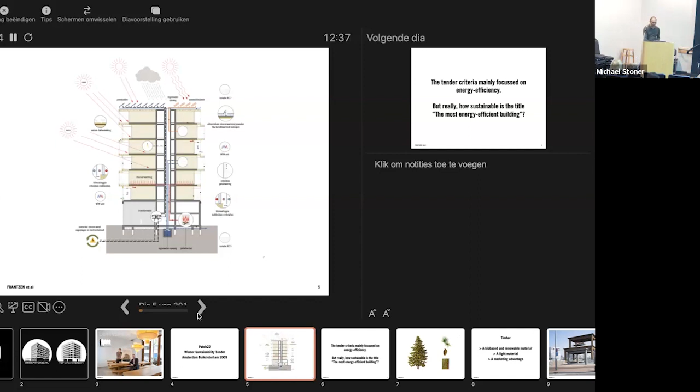So the building is full of solar panels, heat exchangers, gray water circuits, all the technological stuff you can think of, it's in there. But actually, we thought that was quite stupid, because I wouldn't be speaking here 14 years later about this building if it was about installations, since the installations were already old-fashioned in 2015 when the building was completed. For example, the energy score on the Dutch scale is 4.2, which was very low at that time. But nowadays they already make buildings that have a -0.3. So how sustainable is it, being the most energy efficient building?

So we thought we had to go the other way, and we had met Michael Braungart, the writer of Cradle to Cradle, and we were very interested in his theories. So we decided we had to start building with renewable materials, and the only renewable material we really have in the building industry is timber. For us, timber was, of course, bio-based and renewable. It's a very light material, so from a building perspective, these are advantages. But also for us, it was a marketing advantage, because building with timber in the Netherlands hadn't been done for ages.

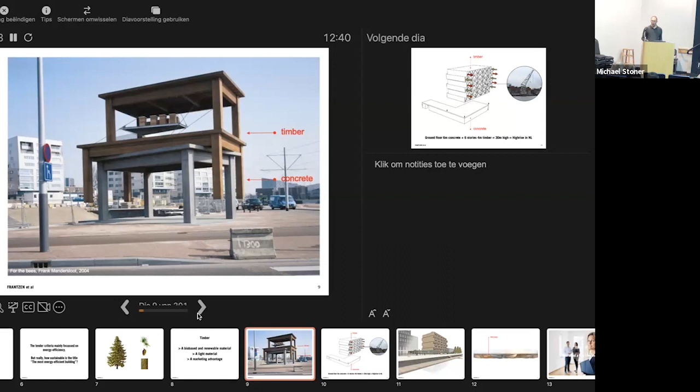It's a concrete table with two timber tables on top, and a beehive in between. This more or less is our building, as you'll see later. It's a concrete podium with timber floors stacked loosely on top, and in their identity they reference the harbor cranes. That's the architecture that we did.

I can also tell the other story of how it went. Every architectural office has interns, and interns always make models. Our intern had cut up styrofoam volumes to create this volume study, and she'd stacked them loosely because she still had to glue them. I passed by to get a cup of coffee, saw the loosely stacked floors, and thought, stop — that's what we are going to make. That's more or less where the architectural concept ended.

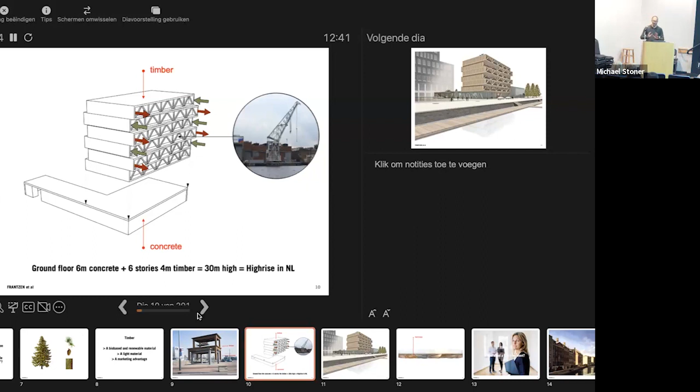And it looked like this. This was our initial rendering for the tendering competition. On the basis of that, we won this lot. So this is yours now. And then we had to start building.

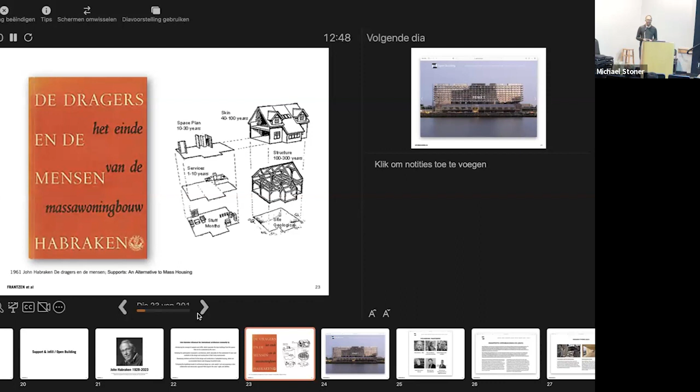And it was already developed in the 60s, and we are shown this diagram now over and over again when we are at congresses and conferences on circular design.

And with this, a number of architects in the Netherlands founded the Open Building community. We have 14 founding fathers, all architects, who all chipped in to get these ideas going again. We wrote a manifesto about how we want to design buildings.

We have research teams, and one of the research teams is Open Building with Timber, so I'm also going into how to build with timber today. A lot of case studies—we document all our buildings on the website, so if you're interested, have a look at it.

Also important, on the bottom we have developed a classification system, and it's a qualitative qualification system. So it's not quantitative, but it more or less says if we want to speak about a very flexible or a maximum flexible building, this is what you have to achieve.

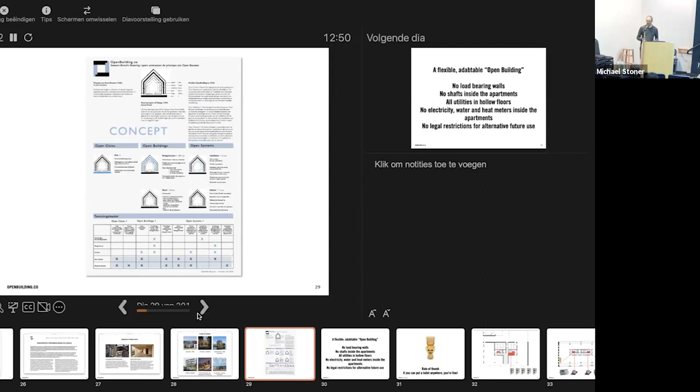There are things like: installations don't coincide with the structure, you don't have load-bearing division walls, and you can have a removable facade. So these are all qualitative elements, and we want to stay in the blue zone—the very flexible or maximum flexible zone—as a group.

So what is a flexible and adaptable open building? For me, it's a building that has no load-bearing walls. It has no shafts inside the apartments, because shafts will always be in the way. If you have a shaft inside a floor plan layout of an apartment, you will not see it when the apartment is finished, because it's hidden by the kitchen and the bathroom.

But if in the future you take the kitchen and the bathroom away, you will have the shaft standing in the middle, and then the next floor plan will also put the kitchen and bathroom next to that shaft. So if you want to make a totally open building, you have to get rid of the shaft. And of course the question is, how do you do that? You also need to have all utilities inside hollow floors.

And you have to be able to replace them later on. Also very important: electricity, water, and heat meters. At least in the Netherlands, you have the building code that says it has to be this wide, but you also have the electricity company with its own private regulations that you have to deal with.

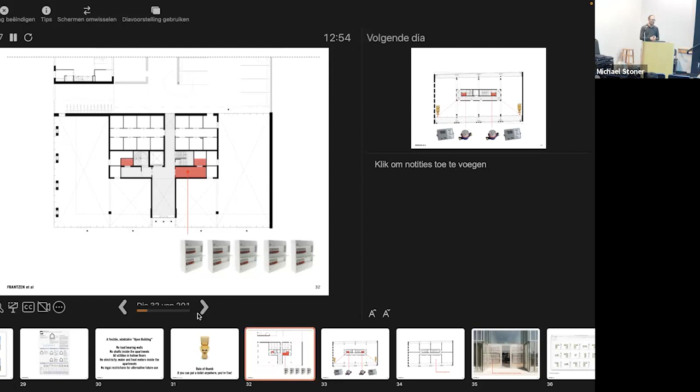So what did we do in Patch 22, starting at the ground floor? This was very innovative in the Netherlands. We have a meter room, so we have all the electricity meters of every apartment in the building in one space, which is very normal for an office building. That's why we made sure that Patch 22 is not only a housing block but also an office building—it complies with both sets of regulations.

Then we have the shafts in the central core, the structural core of the building. We thought, okay, if we can put the toilet in the outmost corner of the building, and we have enough sloping angle in the floor to get to this central shaft, then we're good. And in the central shaft, we made it so big that we can also have the water meter and the heat meters—they are all in that shaft.

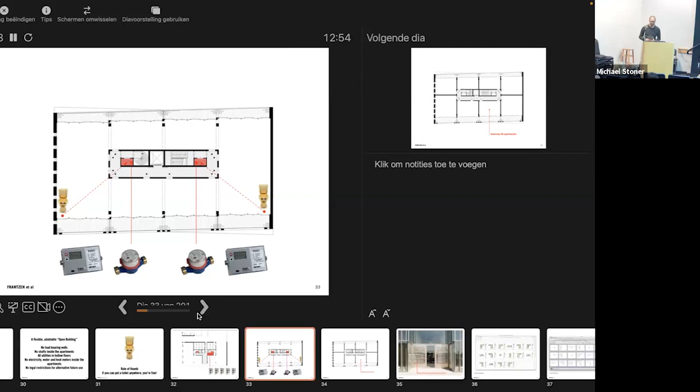And we can divide the floor up into a maximum of 8 apartments per floor. So we also have 8 front door positions, plus 2 extra front door positions, because these apartments in the front can have very different floor plan layouts if you are able to move the front door. So you need to think of a lot of possibilities in advance.

Also the mailboxes—sounds quite stupid—but we can do all the adaptations in the future without a building permit, because it's already in the first building permit. So we also have all the mailboxes of all the possible apartments already in the facade, because you cannot change the facade in the future without a building permit, and it's also quite hard to add extra mailboxes, so it's already there.

But also, for example, house numbers. An apartment is worth more when it has a nice number—so the number 280 would be worth more than the number 278A or B. So we had an agreement with the city that we have a secret list of house numbers in the city's administration for all the future apartments that can be activated in the future, so that we have consecutive full house numbers.

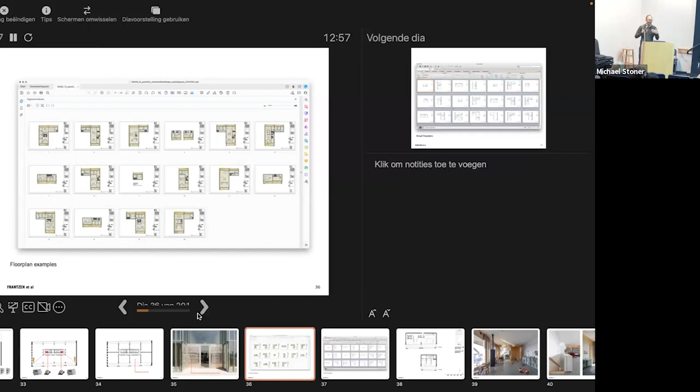With all different kinds of scenarios in mind—the double income no kids, the gay couple, all the stuff you can think of in how people are going to use an apartment in different ways, because they will want a different floor plan layout. By doing so, you sort of play the game that you don't want to know how it's used—you only do scenarios so that every scenario is possible in the future.

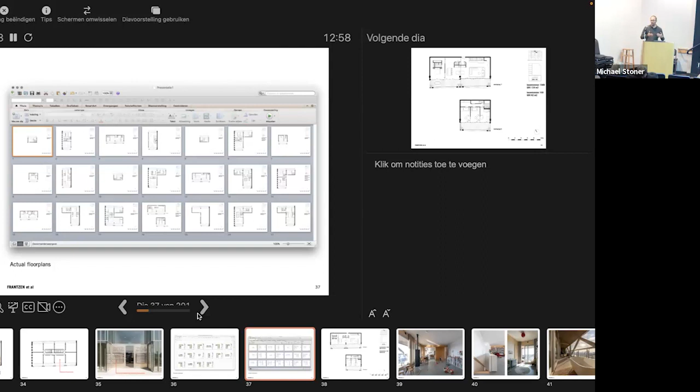And the funny thing is that none of our floor plans is actually realized. We sold the apartments empty to our buyers, so they got completely empty apartments where they could design their own floor plans with our interior architects, or with their nephew or their uncle, and build it with their own contractor or themselves—everything inside was their own initiative. People are a lot more specific than we as architects can think of in our scenario thinking, but that scenario thinking you need for researching the possibilities in the future.

When people can do everything they like, they start installing bathtubs on balconies, something that we as architects, or one of my former clients, would never allow me to do. But they just did.

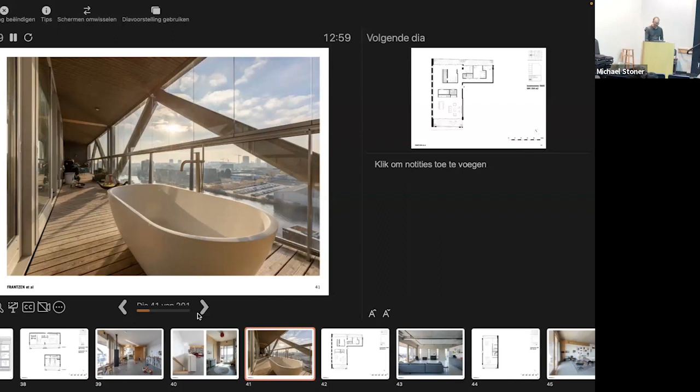Again, an open floor plan, also quite big apartments. We developed this building in the middle of a financial crisis, so we had to sell in 2012, 2013. That was a deep financial crisis. Normal people couldn't get mortgages at that time, and normal apartments were still for sale.

Our competitors, other developers, started building smaller and smaller to increase the income per square meter. But we thought we had to go the other way. We sold bigger and bigger to get to another type of client, because we wanted a client that wanted a special building and that dared to buy a timber building, a timber apartment.

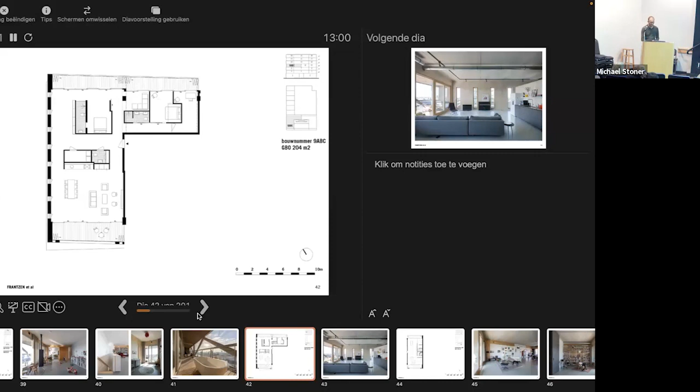So here we have one of our buyers that had all the timber still visible, and everything he added into the building is also timber.

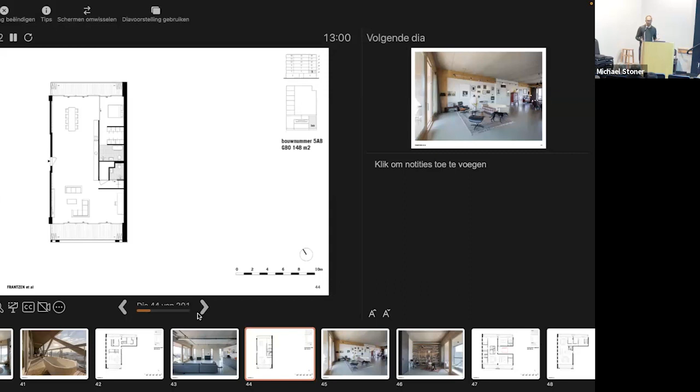Here we have one of the smaller apartments. This is 150 square meters, of a couple that didn't have much money at that time. So they created a floor plan with the least possible amount of walls, because walls are expensive. They created this really nice loft space, where you can also see the bare timber, and you can see that he's very happy with this creation.

Then this is our own apartment that I designed for me and my family in 2015. But then, in the end of 2015, my wife was appointed as a professor in Copenhagen, which in US standards is not far away, but for us it's a different country. So we had to move 800 kilometers to another culture, another language, another financial system. And Copenhagen, when you ever visit it, is really expensive. Having a big home in Amsterdam and a big home in Copenhagen, we couldn't do it.

So we had to sell, which of course, you know, this is my baby. So I didn't sell all of it - I kept the kitchen. This was sold, and it was completely redone on top of our utilities that were already installed.

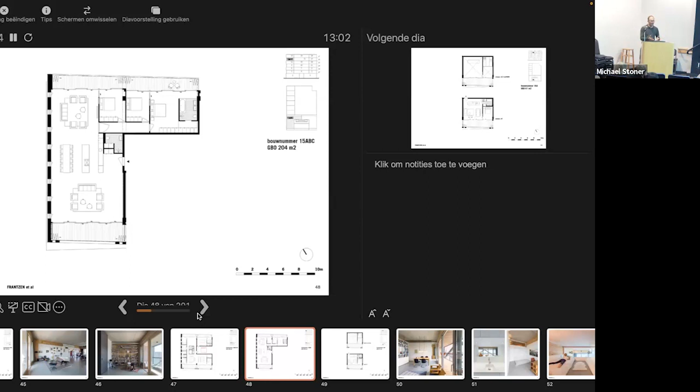You can see that it's possible to create a totally different floor plan on top of it. This was our kitchen, and we dug some holes in our top floor, and the smallest employee of my contractor, went into the floor because it's a hollow floor, and cut up some stuff, connected some things.

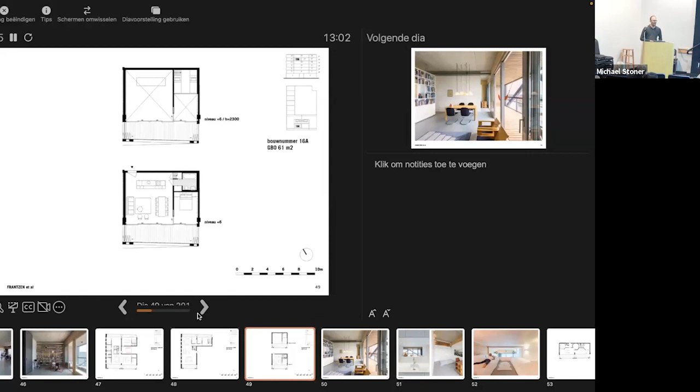It's a 61 square meter apartment, so this is perfect for a couple, with a Murphy bed coming out of the wall. Because when my family was living in Copenhagen, I also used this as my office, so I could simply get rid of my bed.

And here we had a storage space on top of the bathroom, and we stored our kids in there.

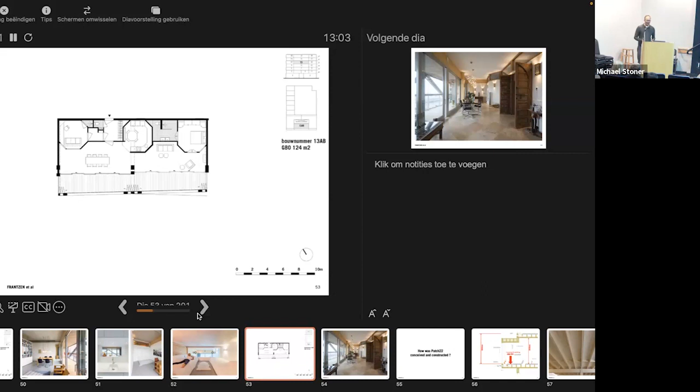A floor plan that you wouldn't come up with as an architect, not often at least. But it actually is quite a cool floor plan. When you see this, it's totally not my style - I hate the style. But I really like it that it's inside the building, because the owner of this apartment...

It's her style. She went to Morocco to find these antique doors. She went to Spain to find the right tiles for her individual expression. And I think that is very important and very cool.

So let's go a little bit into detail - how was Patch 22 conceived and constructed?

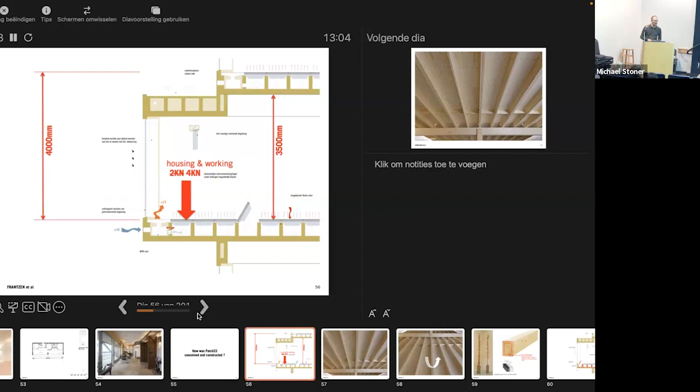As I already said, it is housing, but it's also an office building. But an office building has a higher floor load than a housing block, so it's 4 kilonewtons per square meter instead of 2 kilonewtons. It has a higher floor, so it's totally oversized, because in an office building, perhaps you need some pipes, some ventilation pipes, and everything day one. So you need the oversize.

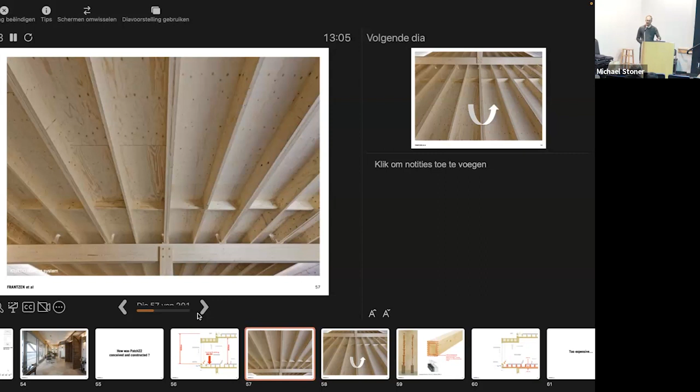Our idea was initially to create it with a prefab timber flooring system called Kerto, but not to use it like this official way. We thought of just using the same product upside down, and then filling these, because you always need a ceiling, but you need to be able to get rid of the floor to access all your utilities.

Then you come to the question of how to make timber fire safe. We are very lucky that in the Netherlands we have a building code that doesn't say how to achieve a performance, it just tells you what the performance needs to be. So for our building, our structure needed to be 120 minutes fire safe.

Inside the tree, there's always another tree. So if the small tree is your structural tree, and the timber around it is only for fire safety, you can let this timber char away. You can very easily calculate the charring time. The charring goes by 0.8 millimeters per minute, so 120 minutes times 0.8.

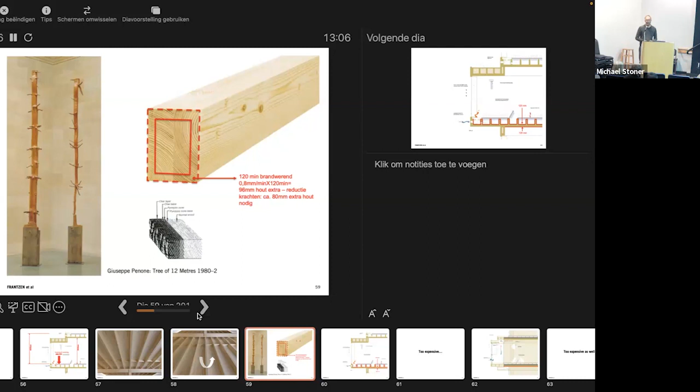Then we have some reduction factors in the Netherlands, because our building code says when there is a fire, there will not be a storm. If there is a storm, there won't be a fire. So in the end, we had to add 80 millimeters of extra timber on top of our structural timber. But that's really easy to do—you just increase the sizes, and as Michael Braungart already explained, when it's renewable, it's okay to use a lot of material.

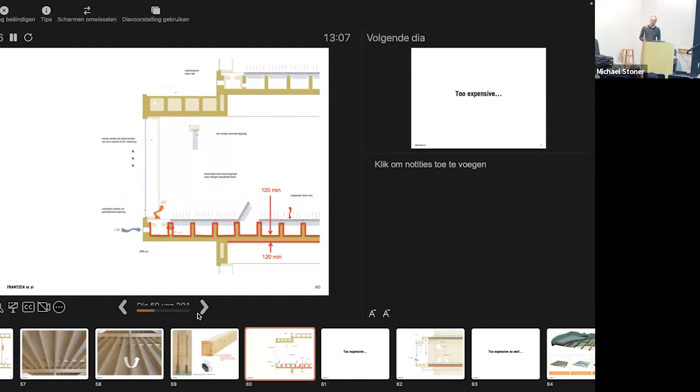But then we got to this point that our structure had a lot of surface, so we had to add a lot of extra timber on that surface. And because this is high-tech timber, it's quite expensive. So actually this idea was too expensive. Then you have to come up with another idea.

So we found a product that worked as a sort of prefab timber slab with a prefab concrete slab on top of it, and then we would have a raised floor on top of that structure. That was already better because the surface of our structure was less, but it was too expensive as well. You know, and I'm a project developer, so I also have to make profit.

So then our contractor came up with an alternative flooring system, and he wanted us to use the slimline flooring system, which is a floor plan system that has been tested and everything. They didn't dare experiment too much with the floors in the building, because the building also had to be insured, and insurance companies are risk avoiding, so that was quite a problem.

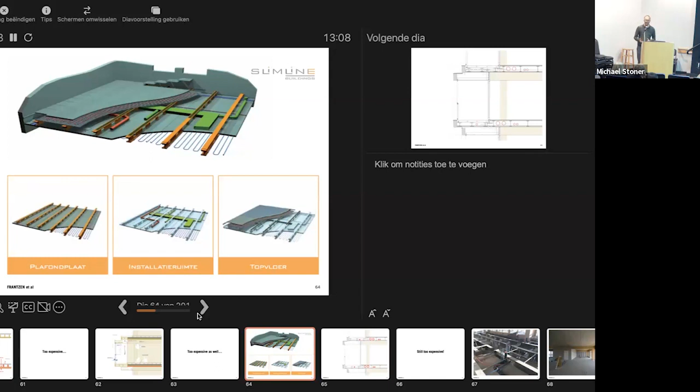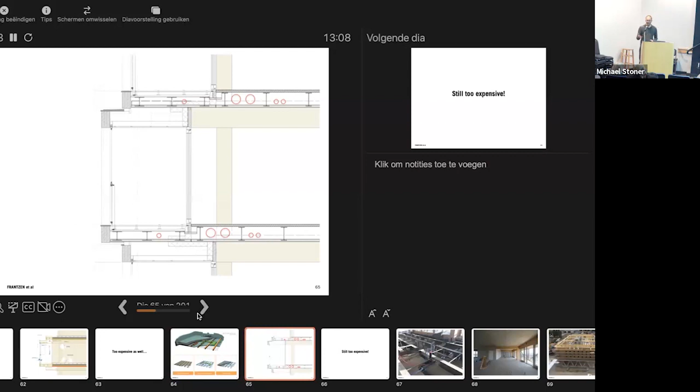So we used this product, and in this floor we have all the utilities, so you can take off the top floor. It turned out that was still too expensive, but anyway, we were already too far in the building process, so this is what it is. It was too expensive, but technically it works perfectly—you can take off the top floor, install all your utilities, and suit it to your floor plan layout.

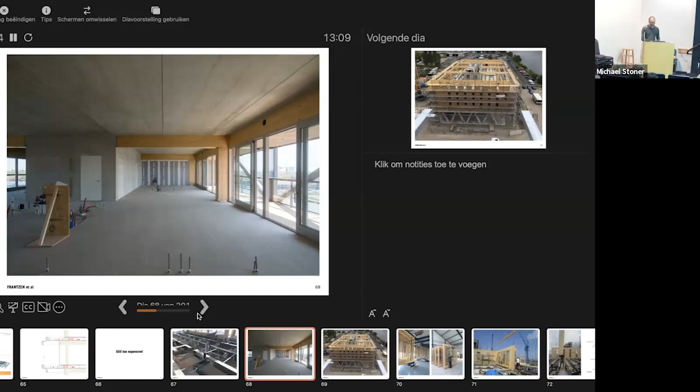And this is what it looks like. This is our apartment, what it looked like before we sold off three quarters of it. So all the pipes and drains and everything are already in the floor.

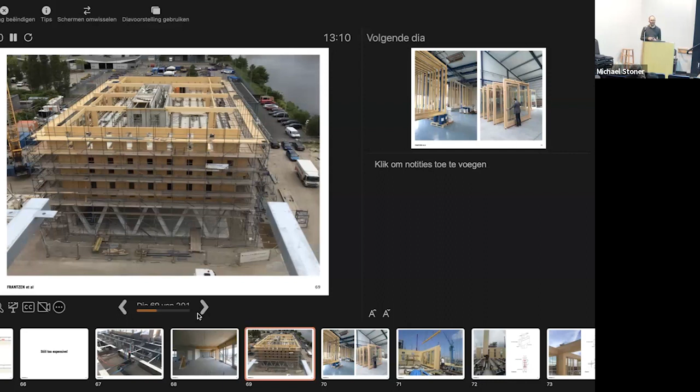The building itself has been built with a lot of timber components, so it's a timber post and beam structure, again to decrease the surface of our structure. If you have load-bearing walls of CLT, you have so much surface that you have to add so much charring timber that it becomes enormously expensive. So it's kind of paradoxical—normally a post and beam structure is more expensive, for example in concrete, because you have more connections and more casting, and that's why in concrete you have load-bearing division walls.

But all the components here are built of timber. Then the components are packed together into bigger components, and they are installed as prefab components on the building site. When you have a timber construction, you have a lot of steel connectors in between, and you have to protect these steel connectors from fire. The funny thing is that the timber you put around it protects the connection.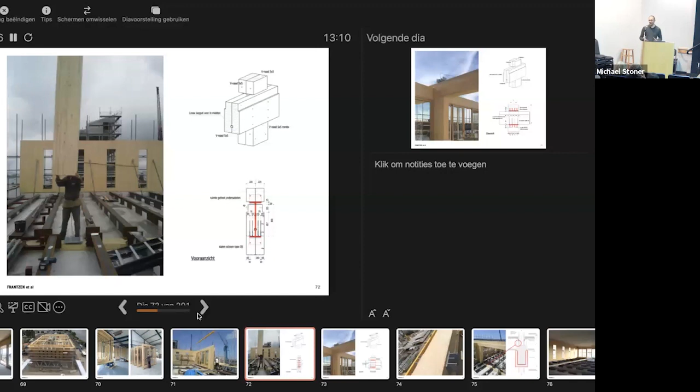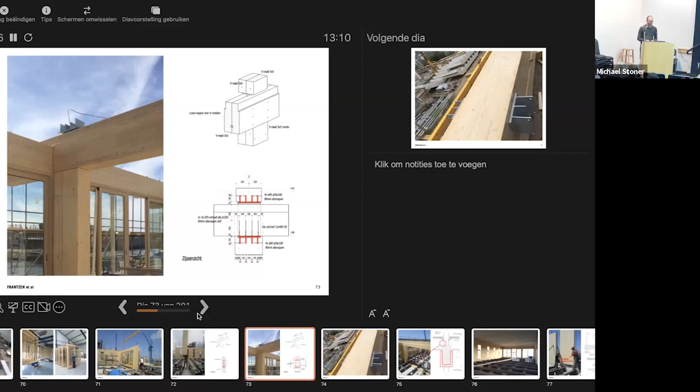This is the same detail, but seen on the other side. And here it's in reality, but it's rotated 90 degrees. It's on the building side.

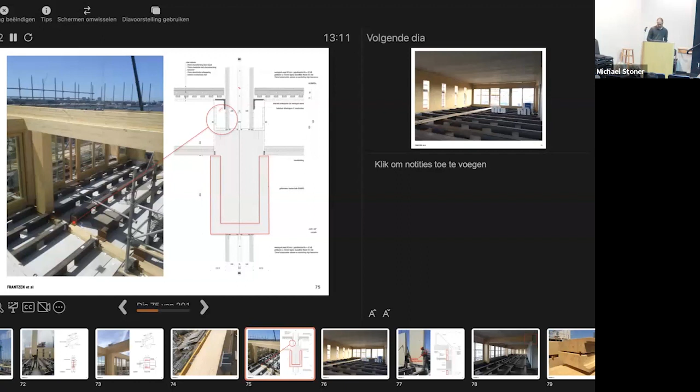This is also an interesting detail. Normally, you would have a beam, and then you would make the beam like this to have joists lying on top of it. But imagine a fire, and then that part chars away, then the floor would fall downwards. So that cannot happen. So we added something, you will see it here. So structurally, the joists hang on top of the beams, and not over here, where it normally would be in a concrete structure.

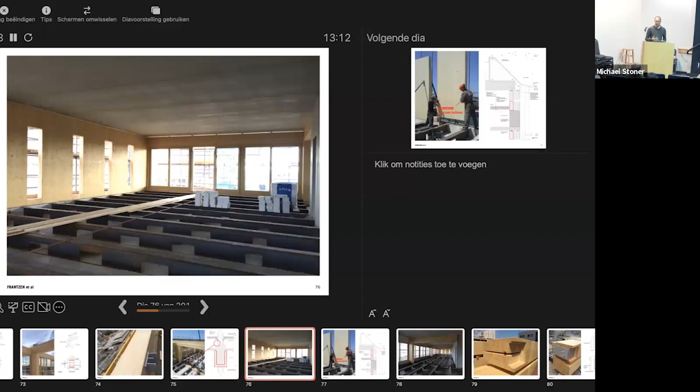So this is what it looks like when the building is totally empty, when we sold it to our clients. And to build it, we had to hire a prefab concrete company, because nobody in the Netherlands had experience with building timber buildings like this. But it really resembles prefab concrete building. The only thing was that normally when these concrete builders have these steel rods with which they push the elements, that's okay because the concrete, they will repair it and paint it and everything. But you cannot do that with timber. So we bought a lot of brooms for them, and we had them use brooms to position all these elements. And well, they found out that it was actually as easy as building with prefab concrete.

But you also see that they make mistakes, because in our detail, this was felt rubber for soundproofing issues, and they had cement in between, because that's what they normally do. And this was on a day that we weren't on the building site. So then shit happens and you get problems.

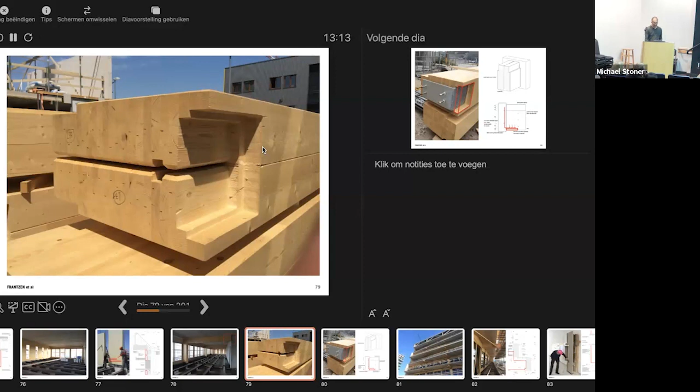This is another important detail: how to connect a beam to the core. And the beauty of building with timber is that you can mill away a lot of the material, so you can make very special detailing, and you can use the timber again to protect the steel connectors in case of fire.

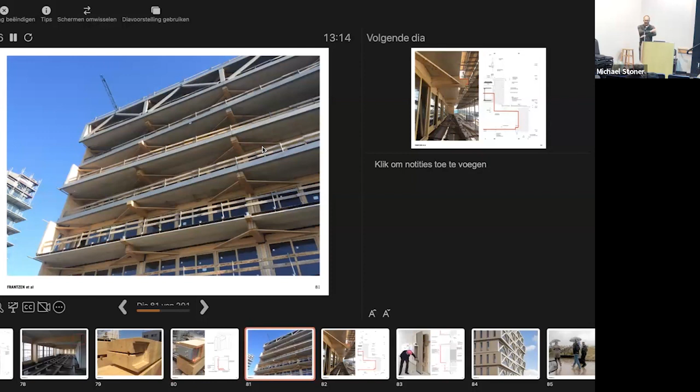And I already explained that the building is a little bit like this, and therefore it was really good that we built with timber, because all the endings of all the beams can all be different since they are just milled. So you can do a lot more special detailing in timber than you can do in concrete, because in concrete you have to build the casts first, and then they all have to be the same, since building 25 different casts would be incredibly expensive. But with timber you can just mill it.

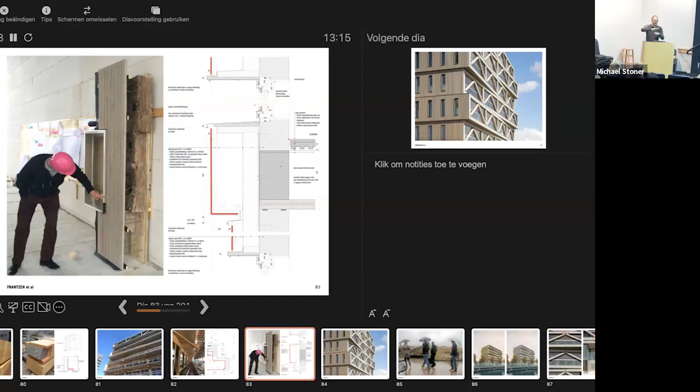This is a detail of the facade. With us, we are lucky - it's allowed to use timber on the facades of high rises. Well, of course, they are treated for fire safety. But in this way, we could detail the building so it looks like different boxes. And very important is that we use the windowsill as one of our main detailing ideas. We have windowsills going over every level, dividing every level - you will see that in the next part.

Because we have these different boxes, and once you start detailing boxes that slide over each other, as an architect you will always have the problem that the floor and the ceiling sort of intertwine. By using this windowsill and making really clean cuts, we were able to suggest this shifting of boxes on top of each other.

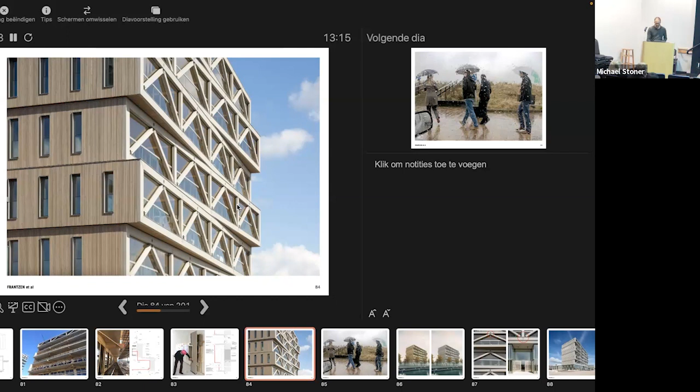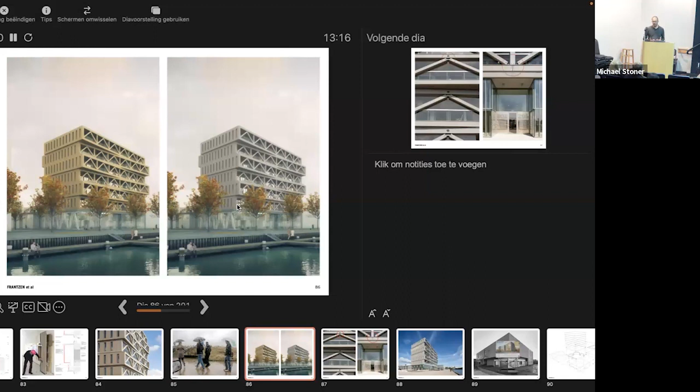So in our climate, you will get these black shadow lines underneath, and it will just look ugly. So we decided to pre-gray the building completely, because when timber is affected by UV, it will end up gray. So we just decided to pre-gray it in the beginning, so that it all has the same color. But also all the structural detailing is at the same time waterproof detailing, so all our connections are at the same time sort of caps going over the top of the timber beams.

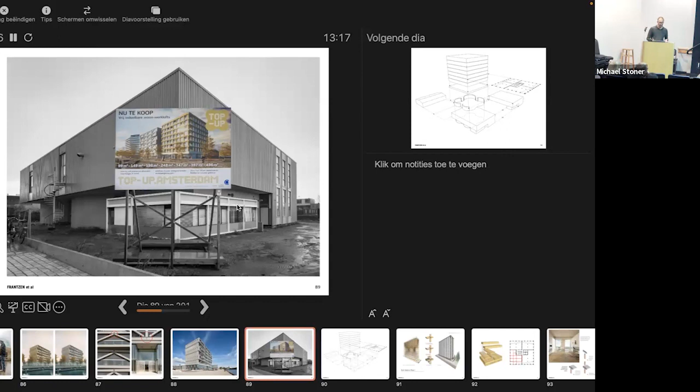On that site was an old industrial building. It didn't look nice, but it had some interesting concrete walls inside it. It was the storage for the transatlantic telephone cable from Europe to the United States, so it's actually a huge cable wall with a lot of concrete in it.

For example, there were 140 piles to the first sand layer. Amsterdam is a swamp, so we have to build our piles. There was already a lot of concrete inside the ground.

As a developer, when you have to start touching the ground in a former industrial area, that is a huge risk because the soil can be polluted. So we decided to keep it. It's also better from a circularity point of view, just keeping all the material that's there. And we added a building to it, which is why the building is called Top-Up.

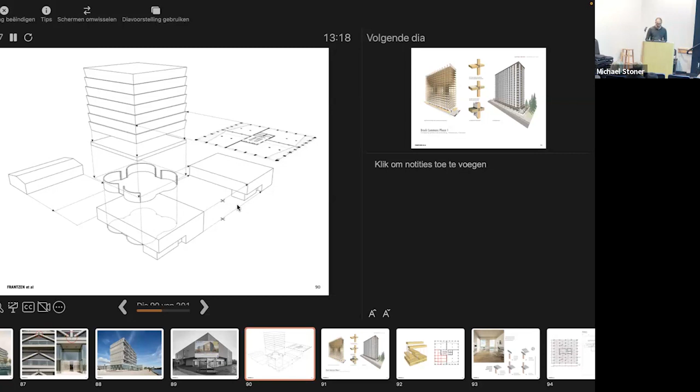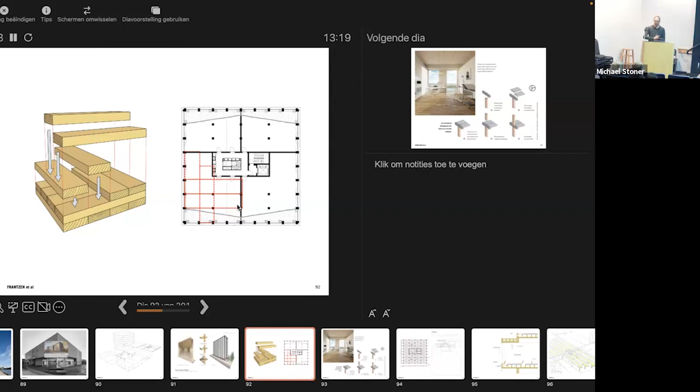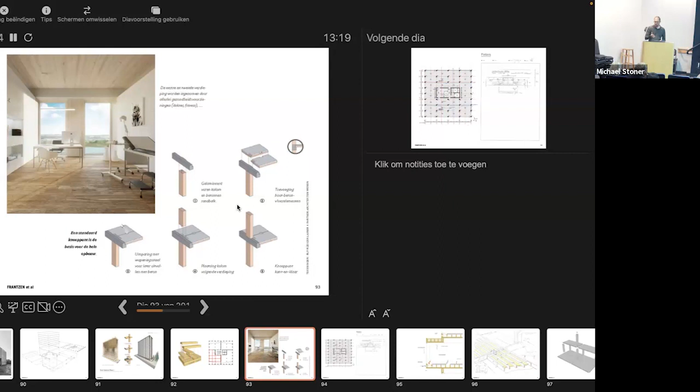We converted that into an idea with a concrete beam, then a CLT floor plate, and then poured concrete on top of it to make a whole floor. We got back to our original system from page 92.

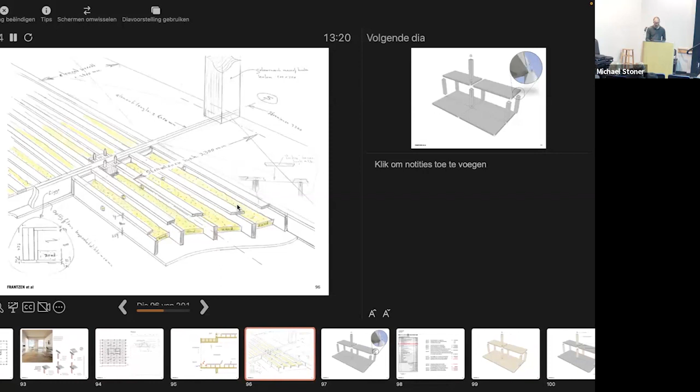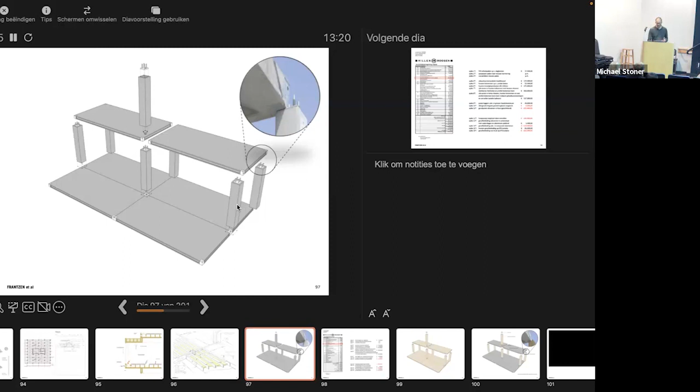How do we build this? We looked at a prefab concrete system called the CD20 system, a concrete prefab system based on timber connections. These are concrete slabs with steel connectors in the corners, so the connection with the columns is over steel, which means you can easily take it apart. But conceptually, this is a timber system - this is how timber structures are.

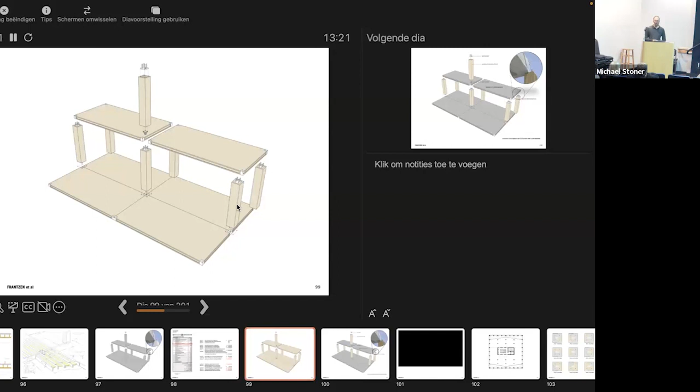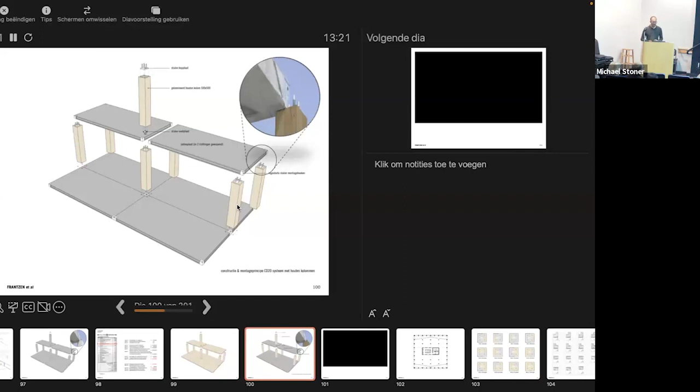We made calculations: how expensive is it, what is our budget, and what can we really invest into timber? Of course, what we wanted to achieve was a completely timber structure, and we would have been able to, if our land lease contract with the city hadn't been very, very expensive. So we ended up with a combination of timber columns and prefab concrete floors.

Now I'll show you quickly how to build it. We were able to build this building in 28 days, wind and watertight, inside the city - this is an inner city site. We had the building prefabricated in Germany, put on a boat, and unloaded in the Amsterdam docks.

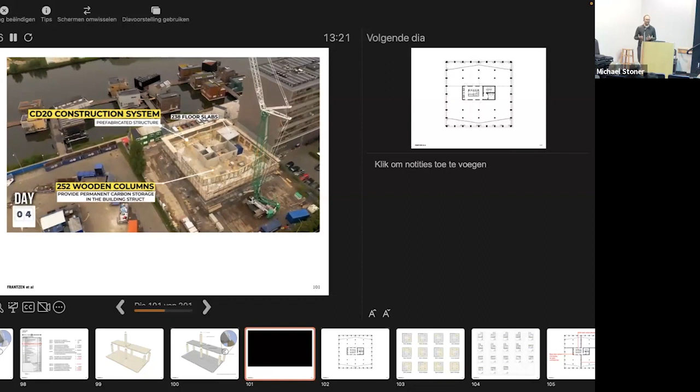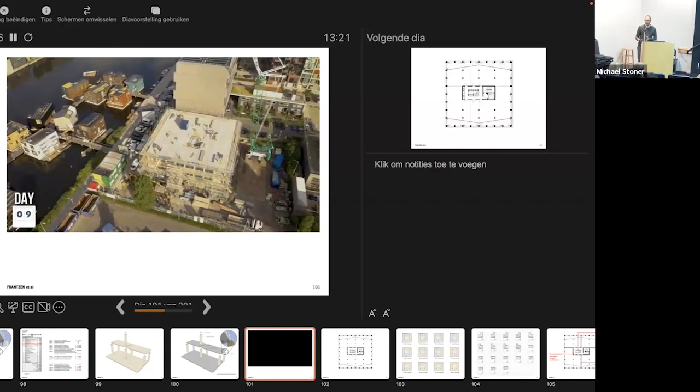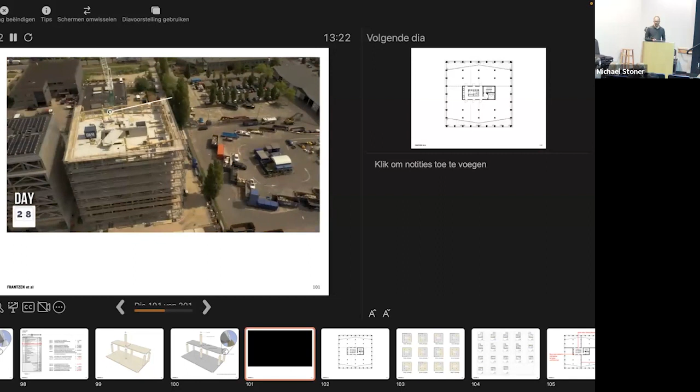We were able to have small vans driving in circles. Because they were small, they were allowed as inner city traffic, so we could have a very well-planned building cycle. We had four days per floor, but actually only built 3.5. Normally this building phase is very frustrating, tense and stressful, but because of our building system, this was a totally relaxed site.

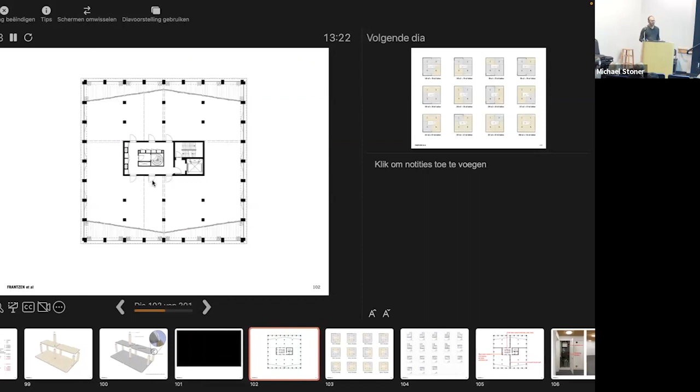Again, the floor plan looks like an office floor. We had different possibilities of connecting units, not as many as Patch 22, but a different one. Again, we designed a lot of floor plan scenarios, and again, none of these floor plans were actually used.

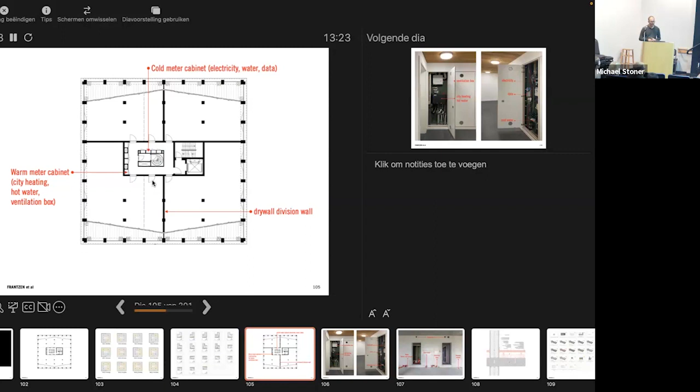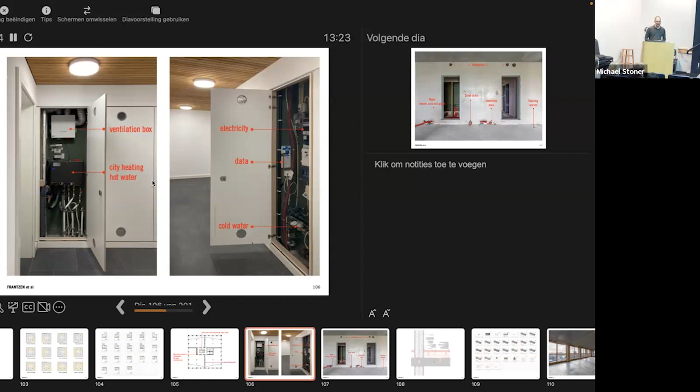Here it works this way: you have the warm meter cabinet and the cold meter cabinet inside the corridor, and a drywall division wall - but this is what it looks like in reality. We also have the ventilation box, so all the utilities needed because of the building code are in the corridor and never inside the apartment. So the apartments are totally empty, and you only have the connections.

So when people bought their apartments, they would step in, step 23 centimeters down, and receive a package with which they could install the floor, because our buyers had to build the red part themselves. Inside this red part, you can have all these utilities.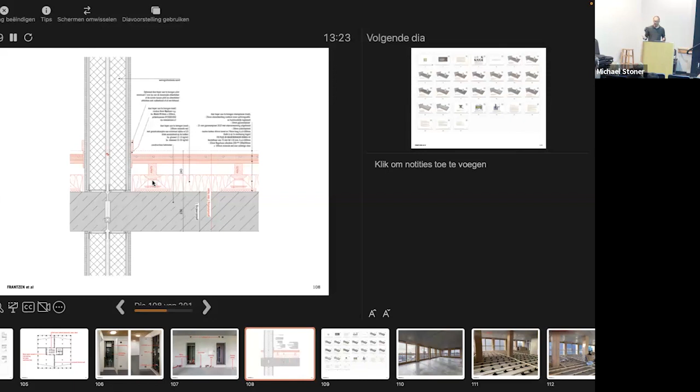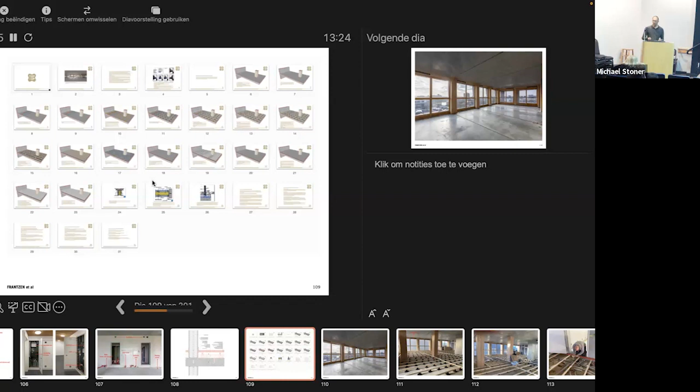As architects, we designed the manual for how to build your infill. We decided not to think of an infill industry, because you don't know who's going to build the infill in the future. If you use a high-tech tile or something removable, it won't be on sale in 30 years. So we really designed a raised floor system that is simple enough that anybody can build it with just a drilling machine and a sawing machine, so every contractor in the future can just do it, using materials that are always available.

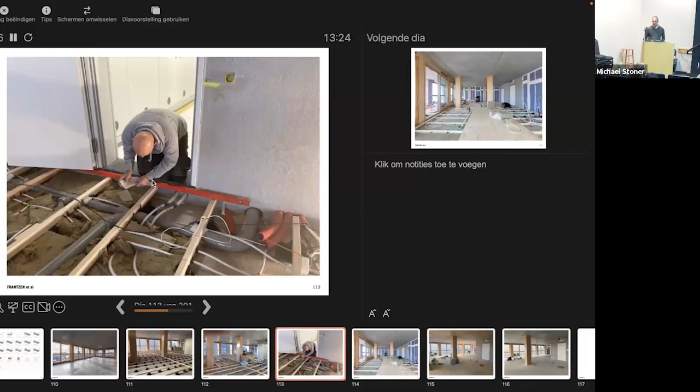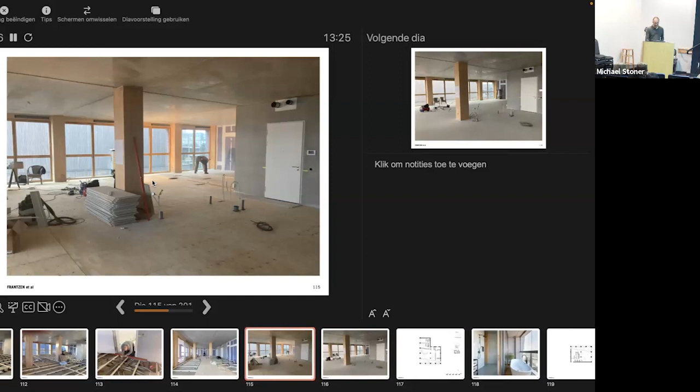This is what it looked like when our buyers got their keys. Then they would start building their floor, adding the insulation and all the utilities inside, adding plywood on top, then adding prefabricated screed slabs on top with floor heating, with radiant heating inside. Again, you get different floor plans - a totally different floor, and of course bathtubs on the balcony.

You get the bathrooms close to the windows.

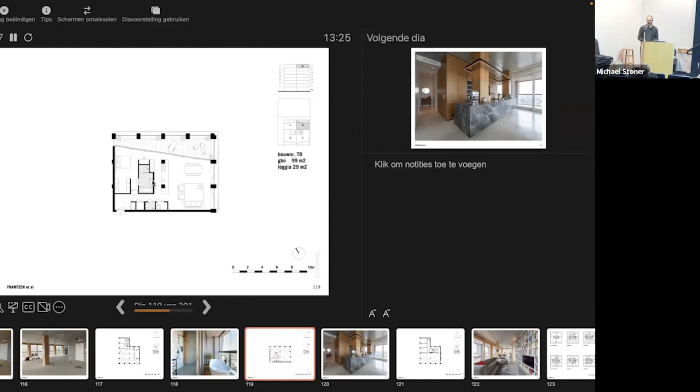Well, perhaps Amsterdam people are a little bit exhibitionistic. But imagine living in Atlanta on the 37th floor - wouldn't you like to have a shower with a view? Yeah, oh yeah, love it. But here they do it.

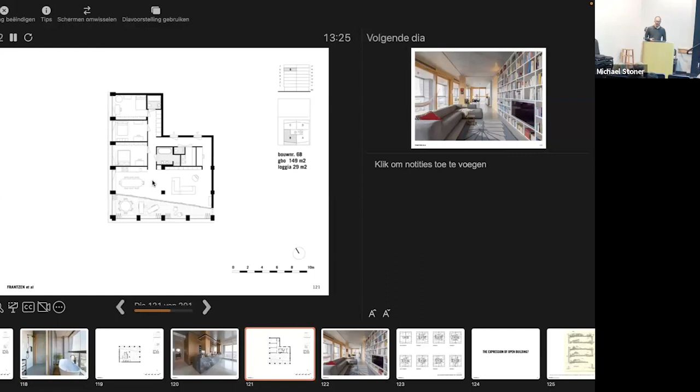Different styles. So this is our own floor plan. After 4 years we came back from Denmark, so we bought another apartment in this block. This is our new interior, and you end up with very funny floor plans. These are adaptable floor plans - every apartment is different, and they will be changed over and over again, and they already have been changed.

I'm sort of coming to an end. The expression of open building, the urban expression, is of course very important. This is more or less the dream of open building: you have a neutral structure in which you can build your own villa. This is really fun as long as they are villas. But imagine this structure with all these nice villas and ranches in it - that would look crazy. The architects went free. But then you have Ready Player One, Steven Spielberg.

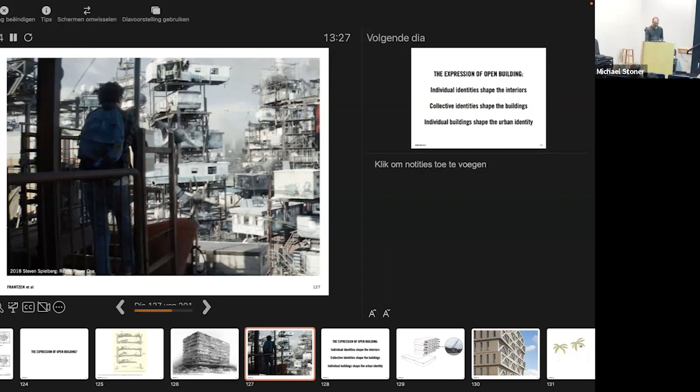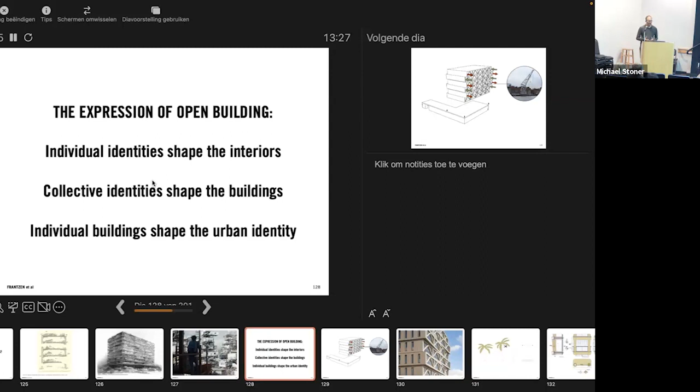You see what happens if you do the same for lower income housing - then suddenly it's not so attractive anymore. So we have to give buildings expression. I think individual identities shape the interiors, collective identities shape the buildings, and individual buildings shape the urban identity.

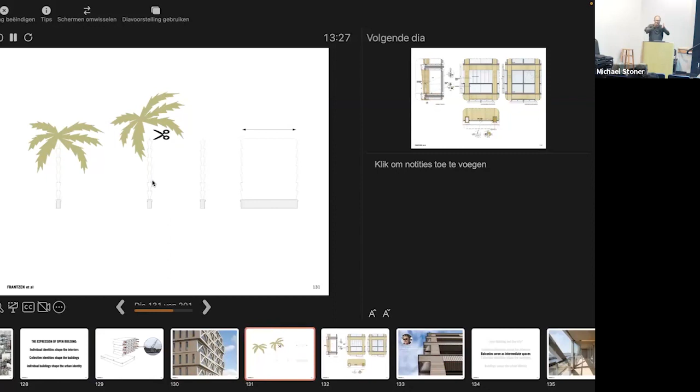So with Patch 22, it's this - you can simply tell your friends 'I'm living in the house, in the apartment,' you'll find it. Or with the diagonals, come over, you'll find it. It has this expression. Top-up also has its own expression of these boxes stacked on top of each other - you could explain it's like a palm tree.

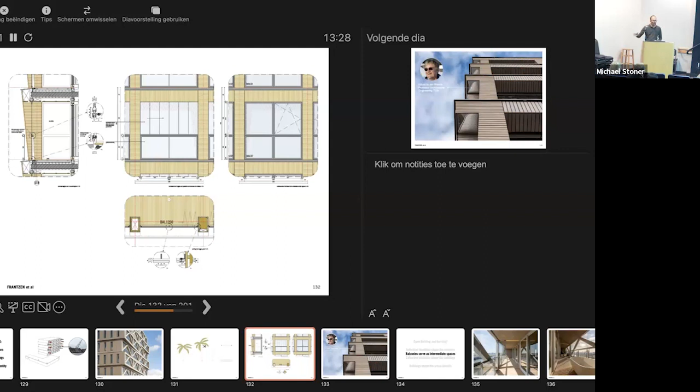There's a little side step. Detailing is very important. By having these tapered floors, the timber facade is never wet, because the rain runs over the windowsill, falls down, and because the facade just tilts away, the water will never reach the facade. In that way, timber is still really beautiful after a couple of years.

The corners are very important in this type of building. I want to give a little tribute to my detailing professor, Jan Westra - whenever there was something he couldn't solve, he used a mirror. With timber, you have directions, and you can see that you have directions from two sides. You could only solve it by having it at a 45-degree angle, but then your timber planks become too short to screw them to something, so that's not possible. That's why we added mirrors in the corner.

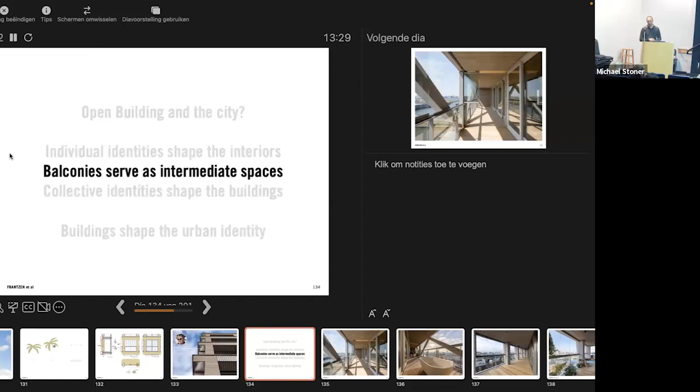People can say, I either live in that building like this, or you'll find the building by just looking at the ceilings and the mirrors in this corner. Very important, and I'm almost finished. The balconies serve as intermediate spaces between the totally individualized interiors and the urban identity of the building as a whole. Inside these balconies, you can do whatever you want - you can have bathtubs, it's sort of an in-between space.

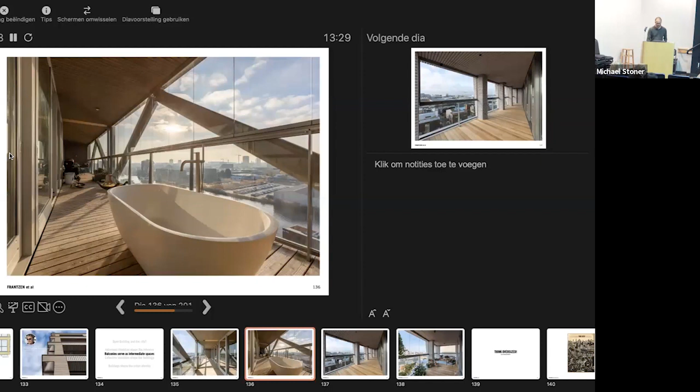This is only stuff - this is not architecture, this is stuff that's put into the space. This is the same space, but on top of it, it's also totally finished. So people are also not able to change the finishings of these spaces because they are owned by the community of owners of the building. They can only add their own identity in it with stuff.

To come to an end, a lot of you are starting architects, so you will be starting with smaller buildings. But I think it's very important to think oversized, think bigger, even if the projects are small. To give you a small example, one of the last projects we did was artist residences for the Frans Masereel Center in Belgium for the Flemish community. Frans Masereel was a woodcutter, so he's famous for his woodcuts, and of course it's easy to propose a timber building.

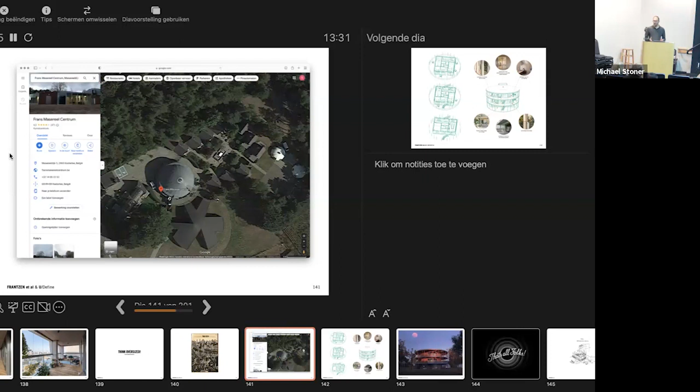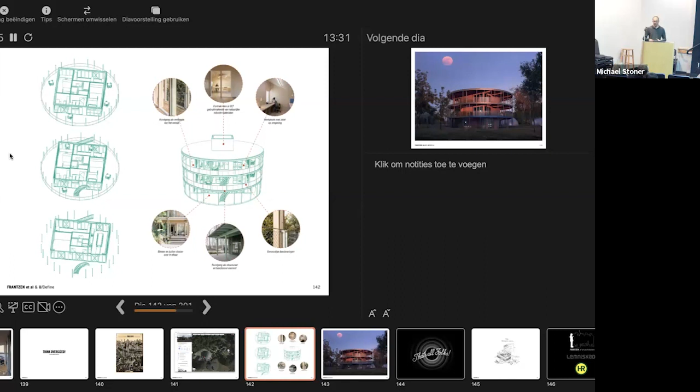His old atelier, his old studio, was converted into a center for graphic arts, and they have artist residences all year long. Somehow this site became a collection of circular buildings, circular as a shape. Here we use all of our ideas - the open building ideas that you can modify the floor plans completely around the central core that has all the utilities and shafts, and a sort of oversized balconies around it that create the image of the building. Thank you.